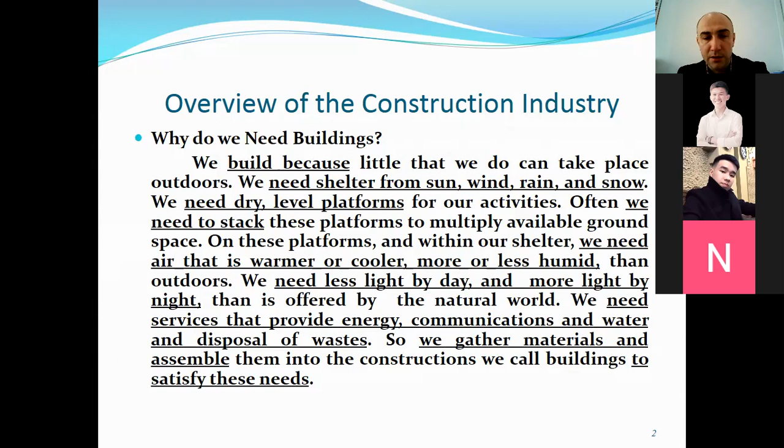So when we actually discuss the construction industry, we need to understand the main divisions of construction. Because when we start talking about types of buildings according to their functional duties, size, and colors, first of all we need to understand the divisions.

So building construction is actually the process of adding structure to an area of land, also known as real property or real estate. Typically the project is instigated by or with the owner of the property, who may be an individual or an organization. Occasionally land may be compulsorily purchased from an owner for public use.

So here I want to show you the four most popular and most important types or divisions of the construction industry, both in our country and abroad. Here is residential construction, public buildings - or sometimes it's called commercial buildings, because the meaning is the same - and heavy construction. What each of these types separately means we'll discuss on the next slides. And also heavy construction and industrial construction.

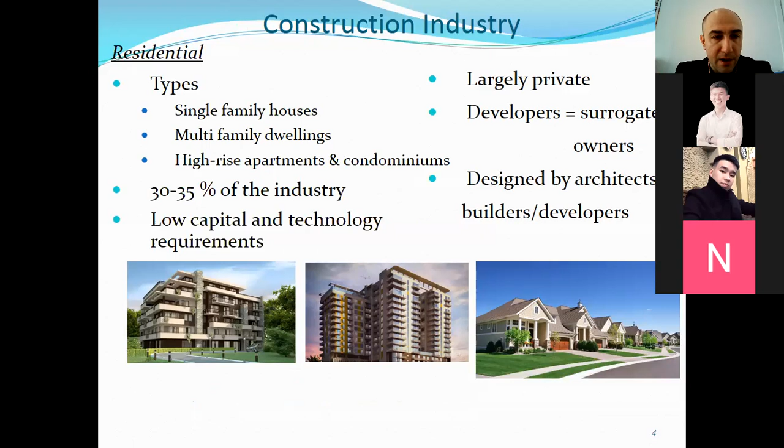So let's take a quick look at the variety of these buildings. Let's start with residential buildings. So residential buildings can be like you see here - single family houses, multi-family dwellings, high-rise apartments.

Also, residential construction may be undertaken by individual landowners, called self-builders, by specialist house builders, by property developers, by general contractors, or by providers of public or social housing - meaning local authorities, housing associations, and so on.

Where local zoning or planning policies allow mixed-use developments, it may comprise both residential and non-residential construction. So, for example, other types like public construction can be included in the comparison too.

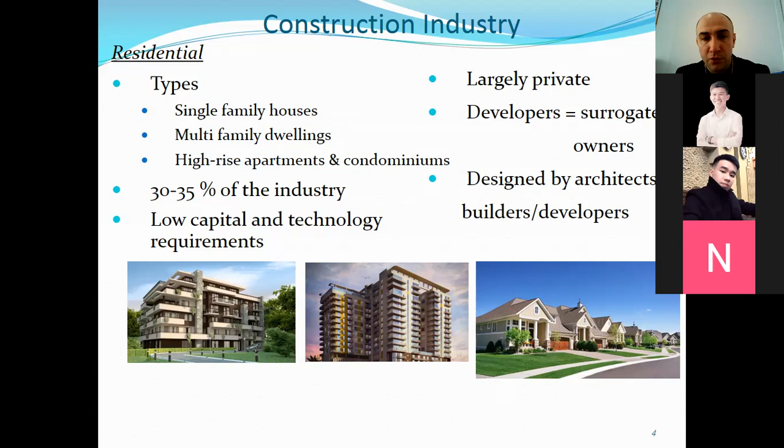That's also important - local regulations, economies of scale. Custom design homes are often more expensive to build, and so is the availability of skilled tradespeople. Professional staff in the organization who deal with the design should also be at a higher level, because it can decrease the time of construction, decrease the time of making the projects, and so on. In general, it will decrease the expenses for the project and for the construction of this project.

Okay, next. So next type is one of the popular buildings. In the previous slide, I didn't mention that it took 30 to 35% of the construction industry - one third of all constructions are built in the various types of cities, not only in our country, but in general.

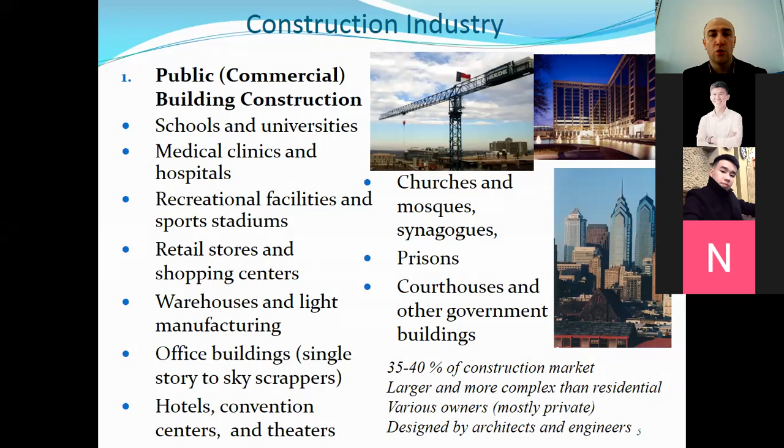So public buildings are non-residential buildings. Construction can be produced by a wide range of private and public organizations, including local authorities, educational and religious bodies, transport undertakings, retailers, hotels, property developers, financial institutions, and other private companies.

So most construction in this sector is undertaken by general contractors. Office buildings and public buildings can generally be categorized first by size and by quality. Let's talk about the size. If we make comparisons between sizes, we can divide any type of building into three parts.

It's low-rise buildings, when there are fewer than 7 stories. In some documentation, you can find various information about low-story buildings - some say less than 6-story buildings, in some places you can find information about 5-story buildings. It all depends on the local codes, local normative documentation - on what number of levels is considered a low-story building.

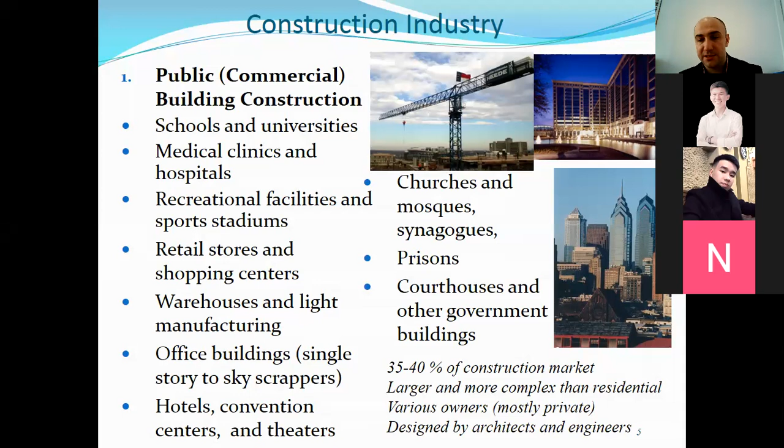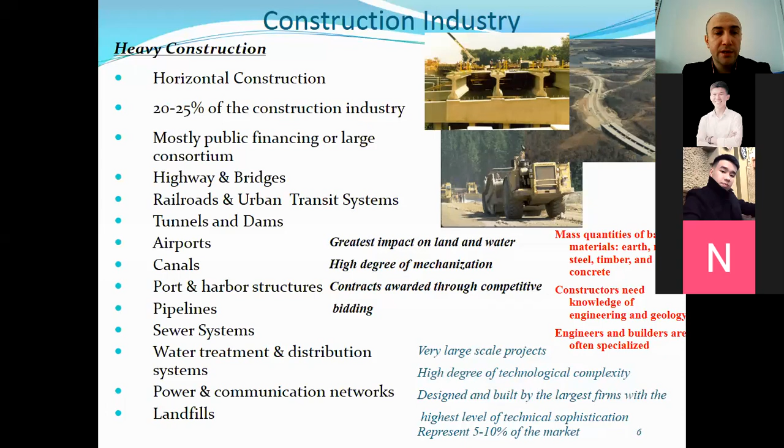Next type of construction division is heavy construction. What can we say about heavy construction? First of all, heavy construction takes from 20 to 25 percent of all the construction industry. It can be considered a very popular and very often found type of construction in any city.

So heavy construction in general is the construction of large structures that require extensive engineering and project management due diligence. This is an industry classification usually designed around firms that are focused on large government projects that require specialized equipment and civil engineering capabilities. Such projects are literally heavy, thus the name.

However, large public projects that are tall may not be considered heavy construction because they use relatively standard equipment and engineering approaches. So the following are common heavy types - what you see on your slides - common types of construction projects.

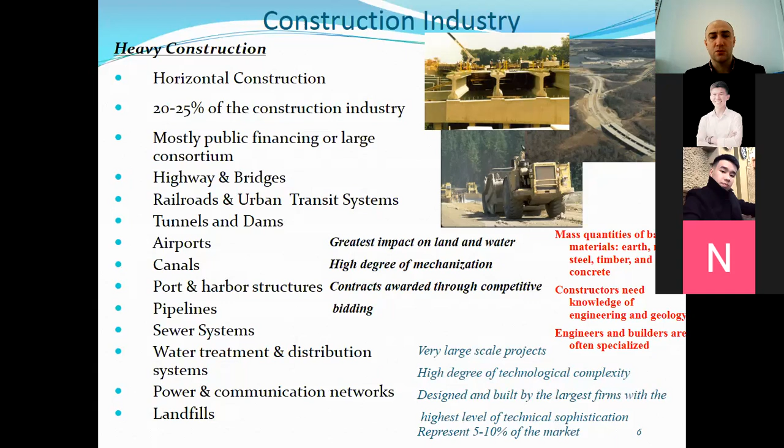The last one for today's lecture is industrial construction. We cannot say it is the most popular construction type because it takes only 5 to 10% of the majority of construction. But at the same time, it is like heavy construction - one of the difficult ones, and it takes a lot of time. It requires highly qualified specialists and so on.

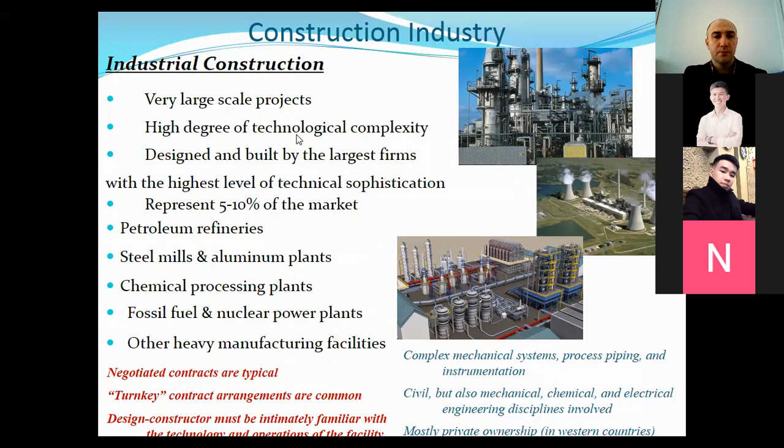So what can we say about industrial construction? It includes construction mainly of energy installations - for example oil and gas platforms, wind power turbines, mining and quarrying, refineries, other process plants, power stations, steel mills, warehouses, factories, and so on.

Industrial construction is a specific form of building that requires expert and highly experienced workers who can perform multitask functions. Many industrial construction companies are large multinational companies. Projects are run by a bevy of managers, engineers, architects, designers, and other qualified specialists. Industrial construction is always located on the outskirts of town, according to many requirements for industrial buildings.